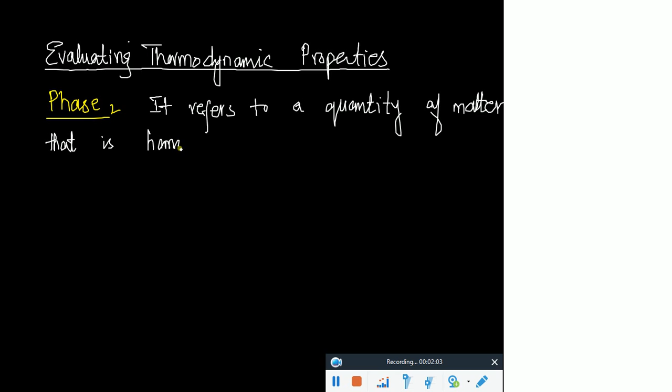First of all, let's define the term phase. So it refers to a quantity of matter that is homogeneous throughout, in both chemical composition and physical structure.

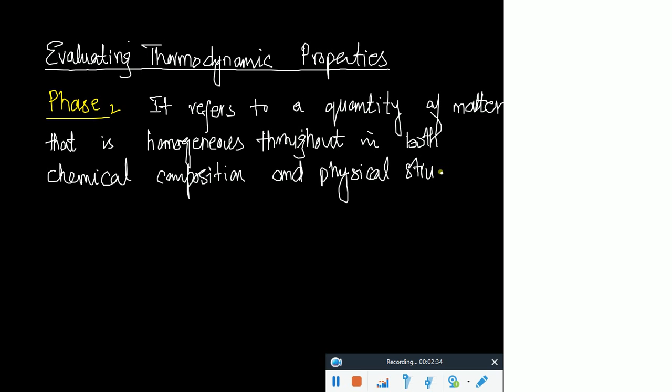Now looking at this, it means homogeneous. It means wherever you check, its properties remain the same, and chemical composition and physical state should also be the same. Just like there are 3 states of matter which we know as mechanical engineers. Obviously there are other ones like plasma, and I think someone has discovered another type, I don't remember the name, but yeah. So we have 3 commonly found states: solid, liquid and gas. Each of them describes a phase.

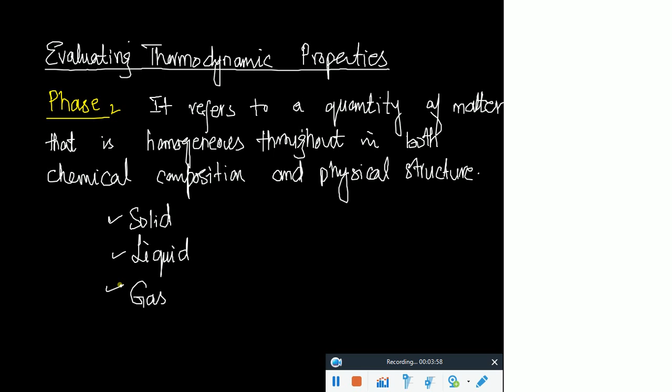Okay, like for example, if I tell you that there are some vapors and some liquid inside a container, how many phases would be there? 2 phases would be there. Now, if you have 2 immiscible fluids that can't be mixed together, just like petrol and water, what does that mean? You would have 2 phases. Why? Because you can't mix them together. So if you are able to mix them together, just like alcohol and water, you would say this has become 1 phase.

Okay, so then there is something which is known as a pure substance. It is one that is uniform and invariable in its chemical composition.

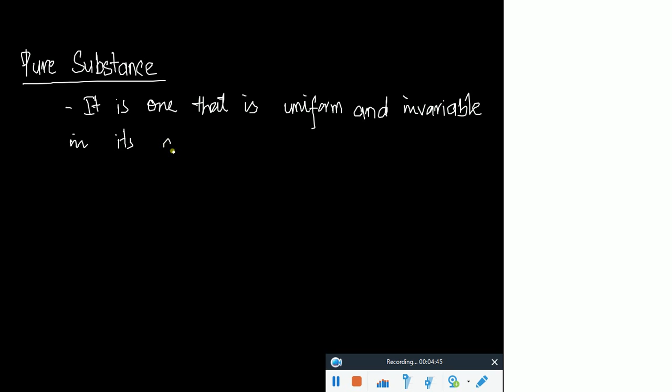Now for example, if you just look at water, if you have water inside a container and that water may have vapors or it may have some liquid as well - if you go to the vapor region and find out the chemical composition, still it is H2O. Okay, if you move on to the liquid region, you can see that its chemical composition is what? H2O. So chemical composition remains the same. So it means water itself is a pure substance, right? So this is something which you need to understand.

So I hope everything is clear about phase and pure substance. In pure substance, you can have different phases, but it should be the same chemical material - its chemical composition should remain the same. If you go into the phase, it relates to the material state, that means solid, gas, or liquid.

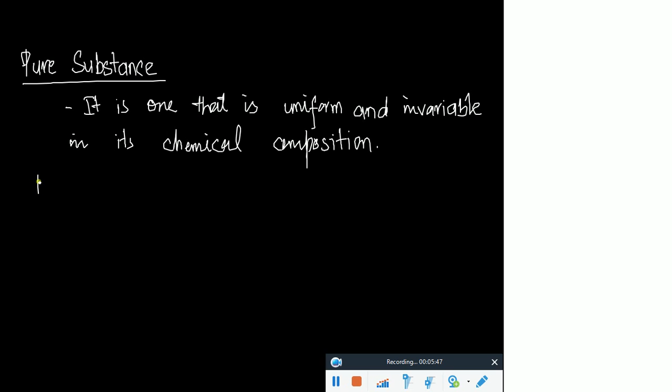Now, how can we find out the properties? Now, whenever you talk about state, what do you mean by that? It is a subset of properties, right? So if you define a state, what is the temperature, density, pressure, energy, everything related to this point. You jump on to the next point, then you define another state, and that state includes all those kinds of properties which you can measure.

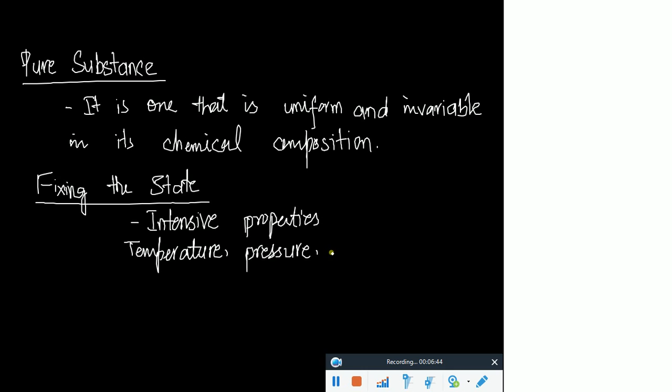So before going for fixing out the state, let me tell you that most of the time we are interested in intensive properties. What are those properties? Temperature, pressure may be an intensive property. Then we may be interested in density or specific volume. Okay, so these are the properties where we are most of the time interested in.

Now, before going to define the fixing state, remember one thing, that in engineering, the performance of any system may seem to be dependent on many properties. Just like, for example, any point in your system may depend on many properties, just like energy, internal energy, kinetic energy, potential energy, pressure, density, volume, whatever you call it. But the point is, in any engineering system, in every subject - in fluid mechanics, in control systems, in dynamics - you would see that sometimes few properties are independent and other properties are dependent on those properties. There would be 2, 3, 4 properties which are independent, and all the rest of the properties would be dependent on those independent properties. So the problem is you have to fix those independent properties first.

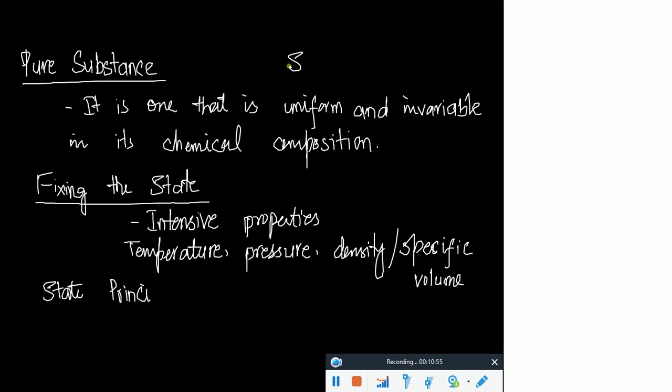Water and some other combination of gases which are commonly found are known as simple compressible systems. Now I hope you understand the word compressible. What does that mean? I'm sorry, this is system. What does compressible mean? Its density can change.

Whenever you talk about compressibility of a gas, compressibility of a liquid, compressibility of a solid - although it is not that visible in case of liquid - you would still have a certain property named bulk modulus in your mechanics of materials course. You would see that it is somehow related with this compressibility property. All these things are interrelated. I'm giving you a few examples from other subjects so you can have a flavor and understand these terms in their broader perspective. So compressibility means that the density can change.

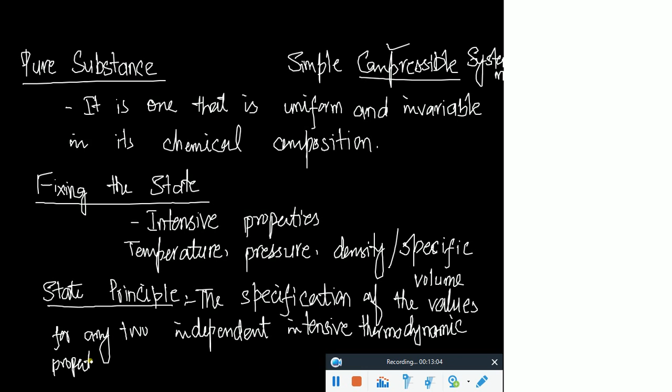So let me define the state principle for those simple compressible systems. Generally, you define it as: the specification of the values for any two independent intensive thermodynamic properties will fix the values for all other intensive thermodynamic properties.

That's what it means - the state principle says that if you specify two intensive properties of a thermodynamic system, it is sufficient to have all the other related intensive thermodynamic properties. For example, if you have temperature and pressure, you can measure all the other properties related to density, energy, enthalpy, internal energy, all other things can be measured. Similarly, you might have chosen temperature and specific volume.

By the way, specific volume is just the inverse of density, I hope you remember. So specific volume and temperature - it means that pressure would be a function of what? Temperature and specific volume, that's what it means. For example, if I need to find out pressure as an intensive property and I have temperature and specific volume, it would just be a function of these two things, like any other property - density, internal energy, enthalpy.

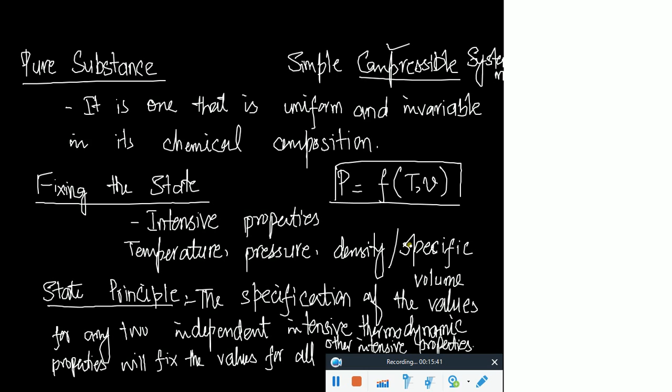You can say it's your parametric space. What does that mean? If you have pressure, temperature, specific volume, internal energy, enthalpy - let's say there are 5 variables and every variable would have so many values. Just look at the combinations which can be made by those 5 properties - it can be a huge number. So out of that huge parametric space, you have reduced it to only two independent properties.

Now this is quite interesting. We need to understand it very carefully. Just look at those lines.

It depends on you, but sometimes you have to perform experiments to check the independence. There are other techniques as well, like the Buckingham pi theorem in your fluid mechanics course. Most of the time it depends on experience - you can't just straight away say this is my independent property and this is not. Sometimes you have to use your experience, your knowledge, or rely on experiments. It is not that straightforward.

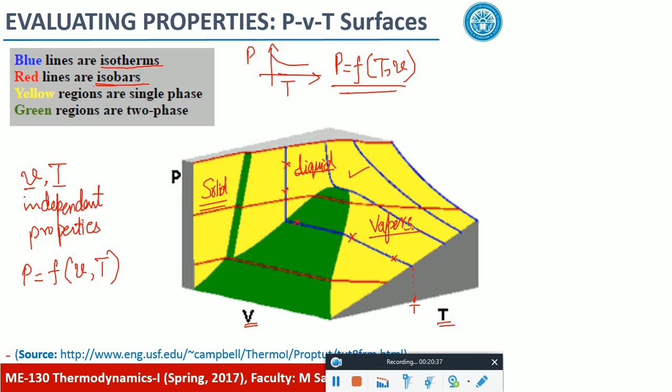For example, if I choose one point here on this surface - this is the point where I have a value of P1, V1 and T1, and this specification defines an equilibrium point. All of the points on this surface define what?

Equilibrium points. Now what does that mean, equilibrium points? Without giving some external energy, you can't change the state of the system. This is something which is an easy understanding for equilibrium. Without doing something externally, you can't change the state of the system. So you can say, if you talk about this point, any point.

So all the points define what? Equilibrium states of one system. Now quite luckily, there is a similarity found in the natural composition or the natural behavior of all the thermodynamic systems. Like for example, if you look at this, the surface would remain the same.

The overall shape of this surface would remain the same for all the thermodynamic properties, for all the thermodynamic substances. And it's quite interesting to see that even if you talk about a mixture of gases, you talk about water, you talk about any other thing, the shape of this surface would remain the same. And this is known as PVT surface. So in general, the shape of this surface remains the same for most of the thermodynamic systems.

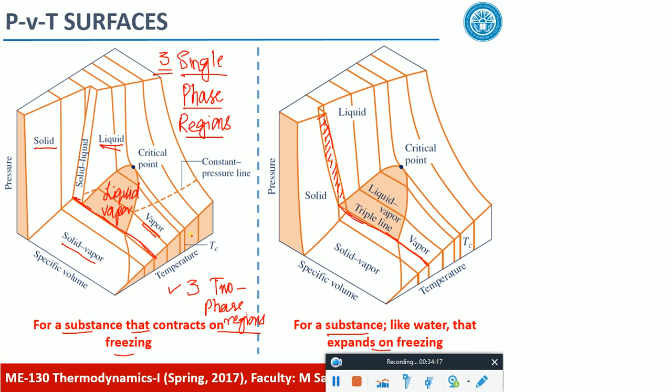Now, all these three regions—you have three two-phase regions. Now just look at this line, this red line, or this line. Along these two lines, you can say that all three phases would coexist. It means if you look at temperature, pressure, and specific volume values, and you get a certain set which comes onto those lines, this line or this line, all three phases coexist. This line is known as the triple line.

Coexisting means, for example, you have some vapors coming out of that solid part. You may have some ice, and the ice is melting as well, so all three phases are coexisting simultaneously. For example, if you have a cube of ice, you would see some vapors coming out of it, there would be some solid structure, and then there would be some liquid region as well. So they are at a boundary of solid and liquid—this is basically having both liquid and vapor, and this is having solid and vapor. So along this line, you can have all three phases coexisting, right?

No, I'm just talking about this. Remember one thing: these curves, or this surface, the shape of this surface, have been derived from experiments. Remember that—this is not coming from some fundamental principle, that according to energy, or according to first law, second law, or Newton's law, this shape is like this. No, this is something which has come out of experiments. So experiments have shown that along this line you have all three phases coexisting.

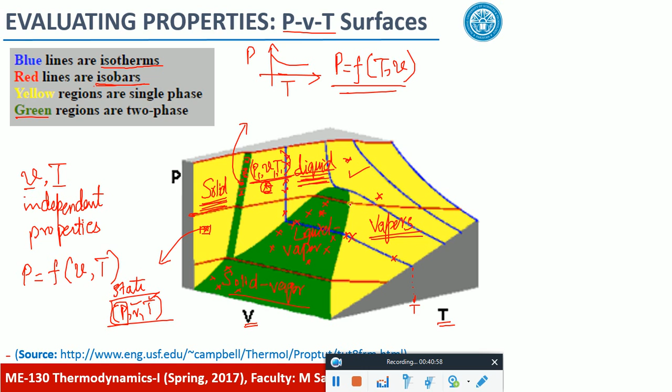What are you talking about, this line? No, if you are talking about this line, this should be an isotherm. If you talk about this line, this is a constant pressure line. Just look at that. The isobar, sorry, this is something which defines a specific value of pressure. So along this whole line you have the same pressure, so this is an isobar. If along some line you have the same temperature, it is an isotherm.

No, this is the maximum temperature where those two states can coexist. Solid liquid, it can be having a... No, I mean in this case this boundary lies along this line, it is not lying on a point, right? So that is why it is called a critical point. So it can be called a boiling point? No, I would discuss that boiling point as well.

So what do you call the pressure line going through the critical point? If you look at this pressure value, it would have a certain pressure P1, for example. There would be some other point which would also have that P1. There are so many points on this surface. If you connect all those points along this surface, this could be a critical pressure line, or you can say this is an isobar. That's what it means, okay.

Then in that case, by the way, there is a certain point from the practical point of view. I am talking from the practical perspective, in the applied sense. Applied sense says there is a point where this discussion becomes meaningless, whether the system is in liquid state or in vapor state. So there are some points we generally don't go beyond. But to define this surface, beyond that pressure line — this is the critical temperature line, this line — beyond this line, on this side you would have liquid, and on this side you would have vapors. Just to understand it, okay. So this is just to answer your question. So any other thing related to this figure?

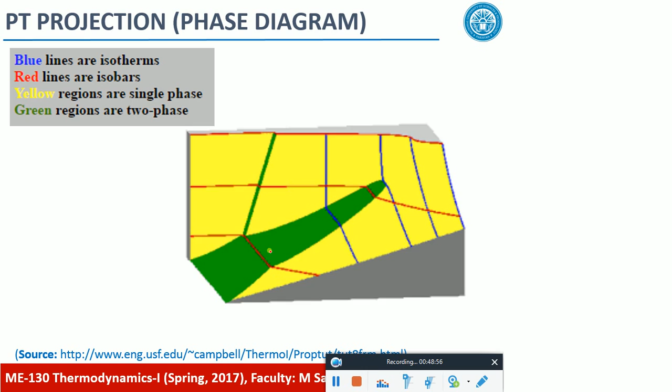You can't say that. You are ignoring the fact. You are just trying to make the things easier for you. You are just trying to simplify the things.

I told you that for Kelvin temperature you define the triple point as the reference, right? So this is the point we talked about, the triple point, on the phase diagram. This triple point has been agreed upon by the world to have a value of 273.16 Kelvin. This was agreed because you need to set certain references, certain standards, so you have to define where your zero lies. So this was taken as the reference point to define the Kelvin scale. You can say this is known as the triple point.

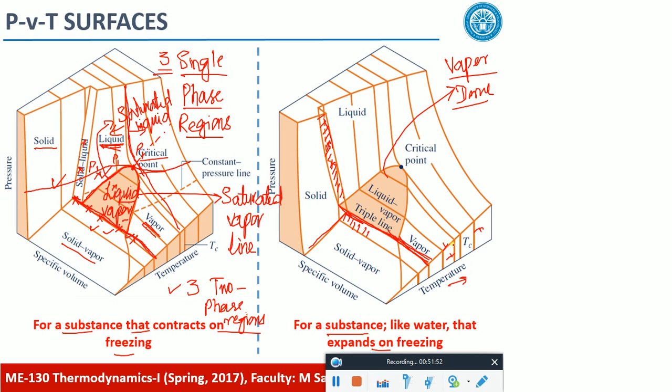What happens if there is a point in the gray region? There can be no point on the gray region, remember that. Why? Because if you just look at the dependence of pressure on specific volume and temperature, you would see this is how the surface goes. Can you have any point in this region? No, you can't have that. Your surface is going like this - for example, if you plot pressure and temperature and it's going like this, if I ask you what is the value of pressure at this temperature, would you say it is there? Obviously you would look at the surface. So this gray region is out of that surface - we are not interested in that. I hope you understand how we look at the projection.

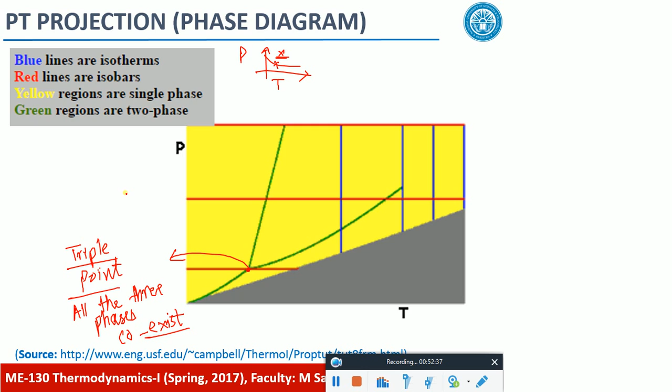So this is known as the phase diagram. Let me show a few points so I can explain that. For the next figure, how many orthogonal views can there be? Three. So we would look at all three.

These are the two plots we were talking about - this one is for a substance that contracts on freezing, and this one is for a substance that expands on freezing. Just look at that slope. So to answer your question once again - beyond this point, this is the temperature, so this is the critical temperature.

So within this region you would have what? And in this region you would have what? Liquid. Okay, so similarly the same thing happens over there.

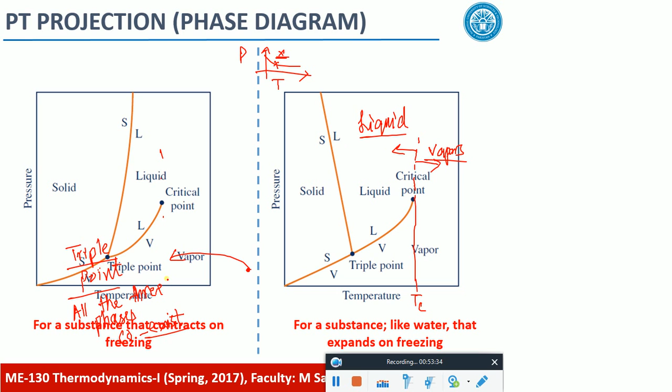So just keep your eyes very familiar with those figures, right? Okay, let's talk about the PV projection. On the vertical axis we would have P, on this side we have V. Just look at that.

So where are the isobars? What are the colors of the isobars? Red line. And you can see that the pressure value remains the same while specific volume can change. Now similarly, if I ask you about this isotherm - let's look at this isotherm. On this isotherm, you would have the critical point, the critical temperature.

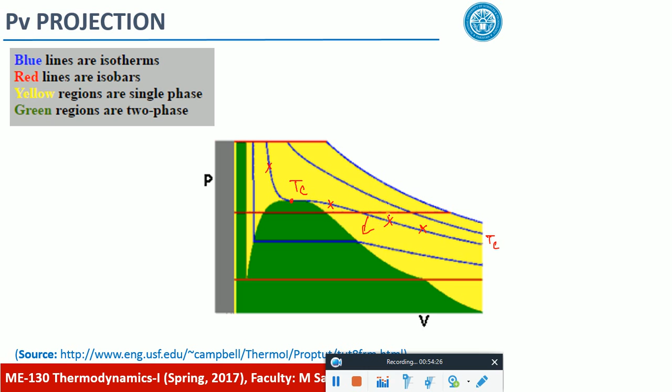So all the isotherms, all the constant temperature lines, which are lesser than critical temperature, they are passing through this dome. Now similarly, for all temperatures greater than critical temperature, you would not be able to pass through that dome. It means you won't be having liquids and vapors coexisting. Remember that.

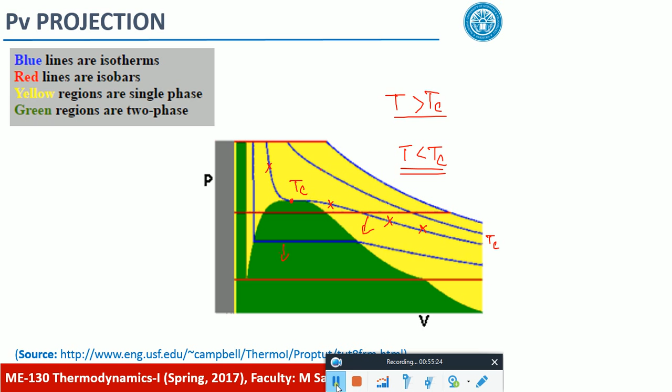So I have told you all the relevant important points. Can you repeat again what - just look at that, you can see how it looks for both. I'm also showing you the projections of those two figures for those two types of substances - contracts on freezing and expands on freezing. Okay, just look at that.

For specific volume, within that liquid-vapor region beyond this triple line, you can see there are certain points where this pressure remains the same. And just think of it - if you look at this region, I'm just talking about this region, this is the solid-liquid region, so this would be the liquid region. Just look at that - beyond this point, you can see that a small increase or decrease in specific volume can affect the pressure to a great extent. Just look at that - what is its slope? It is straight away coming down.

So if there is a small increase in specific volume, what you would see is a sharp decrement in pressure, right? But if you come to this region, which is basically the vapor region, the rate of pressure decrement would decrease. It would decrease, but not to the extent of what was happening over there.

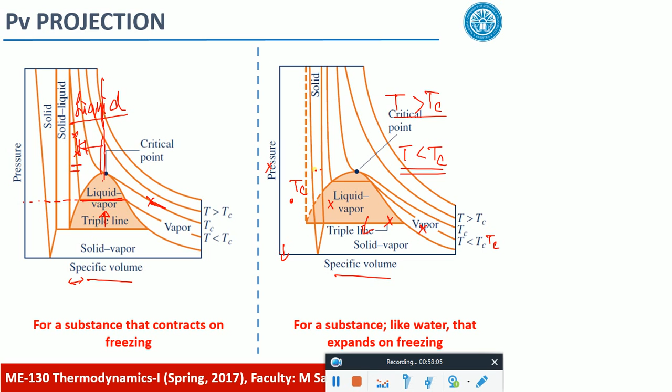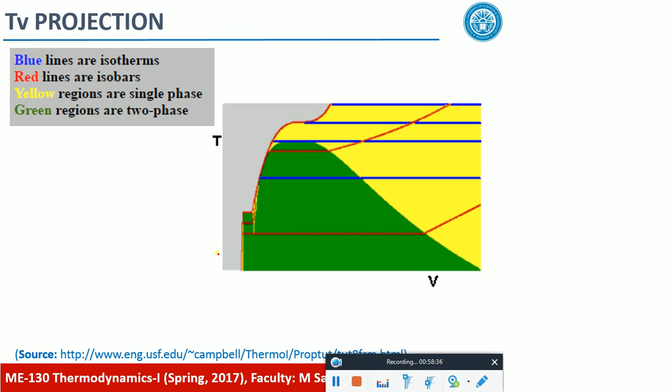And more appropriately for those two figures, this one—just look at that. This is Tv projection, and this is a representative figure for water. Okay, now be very careful and look at this very carefully.

For example, you start from this point. This is state 1, and this temperature is basically 20 degrees centigrade, which is 68 degrees Fahrenheit. I would just be considering degrees centigrade. So this point is basically 20 degrees centigrade, and what you have is liquid water, complete liquid state.

Right? Now this line is what? This line is known as what? Saturated liquid line. This line is known as what? Saturated vapor line. This point is known as the critical point.

Now, if you go beyond that, the situation becomes meaningless. But for the sake of understanding, beyond this critical point we would have all vapor state beyond this point. Now, if you start heating that system, just look at that figure, liquid water.

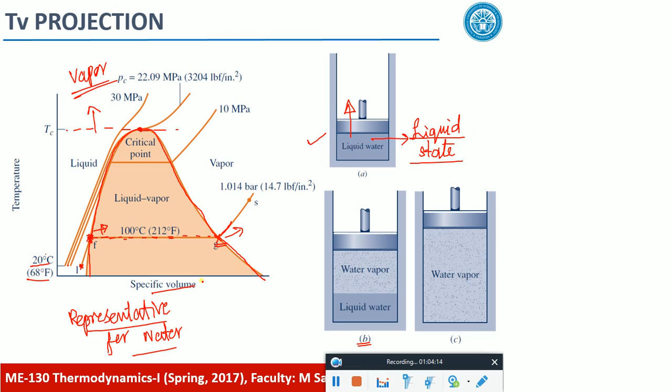So the point is, if you keep heating the system, you would reach that G point. And this G point is what? It defines the complete saturated vapor state. Once you convert all the liquid into vapors, a small change in specific volume would have a large change in temperature. This region beyond the saturated vapor line is known as the superheated vapor state.

This is known as the superheated vapor state. Whenever you talk about superheated steam, you might have heard this word. What does that mean? You are lying in this region, on the right side of the saturated vapor line. Understood?

Yes, along this line pressure remains the same. Now if you change the pressure, remember that. Let me come to the point I wanted to discuss. If you change the pressure, for example, you move to a lower pressure region, what would happen? Would that boiling point be reduced or increased? It would be reduced. For example, if I talk about somewhere here, this would be another isobar having a lesser value of pressure. So this is the boiling point for that pressure.

Is it reduced or increased? This was the boiling point at higher pressure. This was the boiling point at lower pressure. So temperature is decreased. If water boils at 100 degrees centigrade in Pindi, it may be boiling at, let's say, 98 degrees centigrade in Murree. Do you understand that? So that's how you can look at that figure and see what would be the boiling point, what would be the sublimation point, what would be the saturated vapor point, and all that. I'm sorry, where is that? This is point 1, this is F, and that was G.

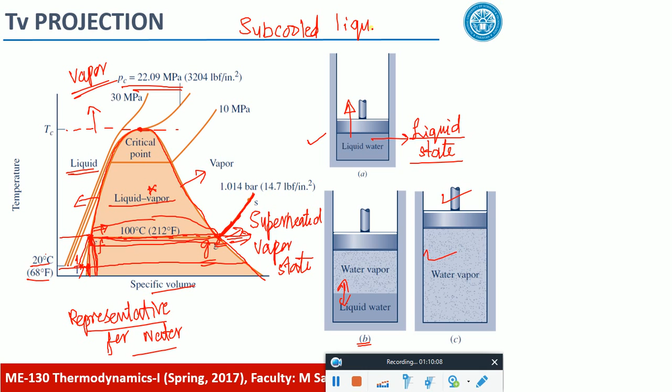Now, by the way, just to define it, this liquid region is also known as subcooled liquid region. I am just going to tell you a few names about these regions. Subcooled liquid region.

You can also call that region as compressed liquid region. By the way, these are the names used in the literature. In different books, you would see those names: compressed liquid region.

And I've already told you that this is something which you can call superheated vapor state, beyond that saturated vapor line.

Now, there comes the question: there should be a quantity which may tell us how much liquid has been converted into vapor, isn't it? For example, if I am at this point on this line, I should be knowing what percentage of liquid has been converted into vapors. I should be knowing it, isn't it?

Now, that quantity which defines this thing, how much liquid has been converted into vapors, that quantity is known as quality.

Are you going to compare this percentage for one level? Sorry?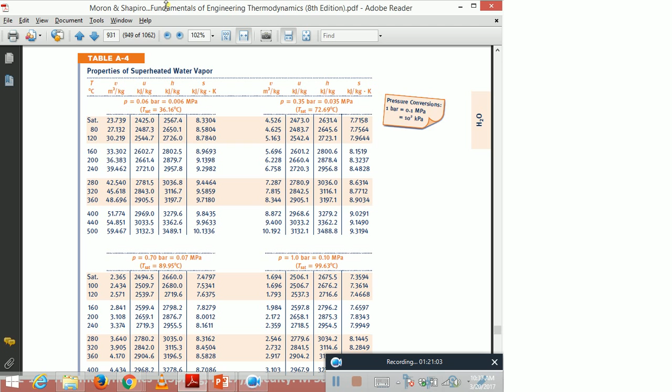Okay, my point is, I hope by just looking at that phrase superheated water vapor - let me make it bigger - yes, this one, I hope it is visible to all. Just look at that. This is properties of superheated water vapor. So similar kind of headings you would see on all the tables. Superheated, subcooled, compressed, all these things are there.

And by just looking at that phrase, you should be able to understand in what region your system is lying. Okay, and then just look at that superheated vapor state. It means that superheated vapor state is starting from which line? Saturated vapor line, right? So if you have this pressure 0.06 bar, you can also convert it into megapascal and all the rest of the units. Saturated temperature is what? 36.16 degrees centigrade. Now what does that mean? It is also giving you a value of the boiling point at that certain pressure. You see? Right? So just see that at saturated pressure temperature you have specific volume like this one.

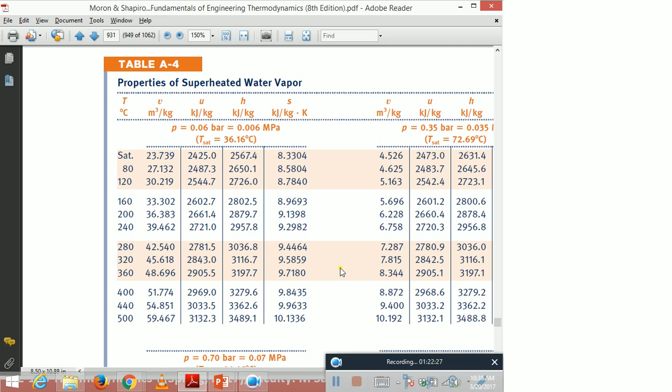Just forget about the other properties, we will talk about that later on. So specific volume is what? 23.739 meter cube per kg. If I ask you what is the value of, let's say, saturated temperature at a pressure of 0.35 bar, what is that?

It is 4.526. Just see, the temperature scale is only there. This temperature column is only there. So all the things remain the same.

Okay, so now there is a very interesting point. If I ask you, let me tell you this very quickly because we are short of time. If I ask you what is the value of specific volume at a temperature of 100 degrees centigrade, do you have any specification for 100 degrees centigrade over there? Not at all. Now, what would you do then? You have a value of 80 and then you would have a value of 120.

So, for example, if it is right in the middle of those two values, 100 is right in the middle, you can take the average. But if it is, let's say, 95, then you would do interpolation. Then you would do what? Interpolation.

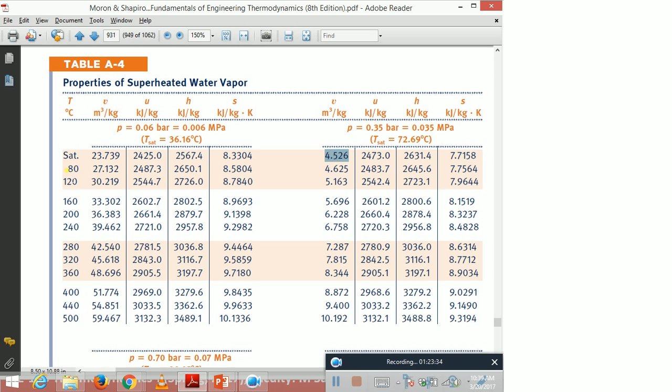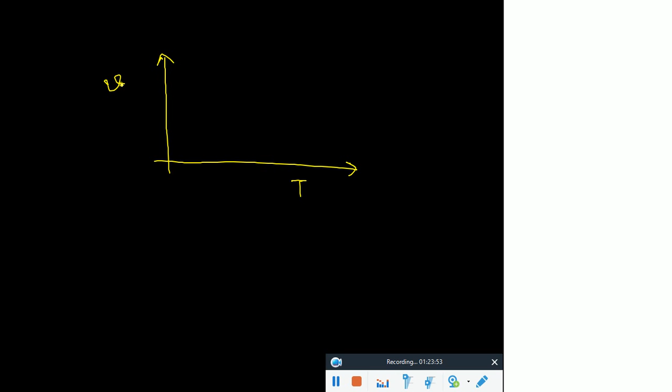Just like, for example, let me plot this figure for you. Let's say we have temperature on this side and we have specific volume on this side. I am just reversing the axis. I hope you understand that. Now this is the point for 80 degrees centigrade, let's say, and this is the point for, let's say, 120 degrees centigrade.

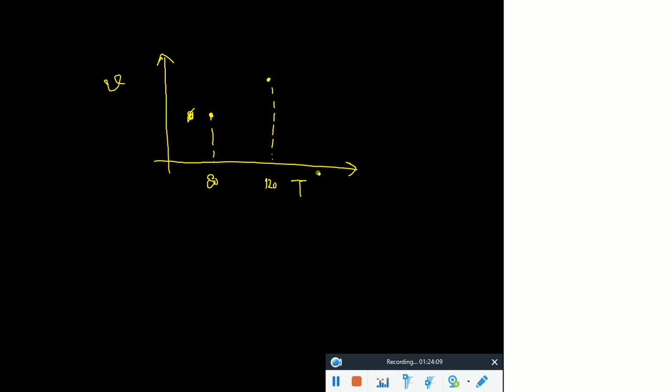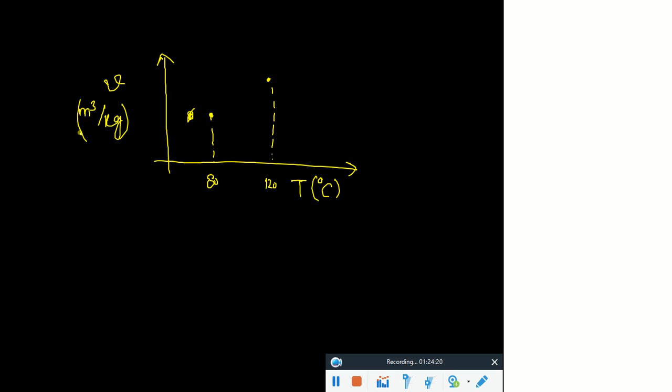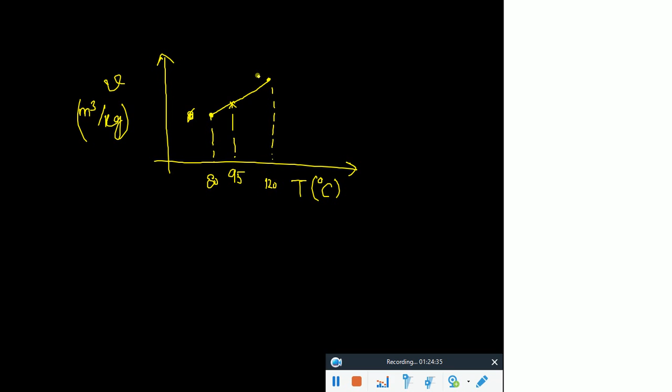Always show the axis label and units whenever you draw the plot. Remember that, right? Now, if I just join those 2 points by a line and I want to find out a value at 95 degrees centigrade, I am lying somewhere here.

This kind of process is known as linear interpolation. Why it is known as linear interpolation? Because I am trying to fit a line for all the data points between those two known points. These are the two known points. So I am trying to fit all the data points between those two known points by a line.

So that is why it is known as linear interpolation. If I draw a cubic line, I would say that it is cubic interpolation. If I am trying to draw something like a parabola between those 2 points, I would say it is a quadratic interpolation, right? So something like that. So you can see what is the difference between linear interpolation, and you would see these kind of things in your numerical analysis course.

But the point is, if I want to have this value, can you tell me how can I find that out? I hope you see, because this is the equation of a line, isn't it? Can I say that this is something y minus y1 would be equal to m into x minus x1? Can I say that? How can I find out that m?

If it is, let's say, T2, and if it is T1, and similarly if it is V2 and if it is V1, I can say V2 minus V1 over T2 minus T1, into x minus. So you can take any, like this would be V1 then, and this would be T1 then.

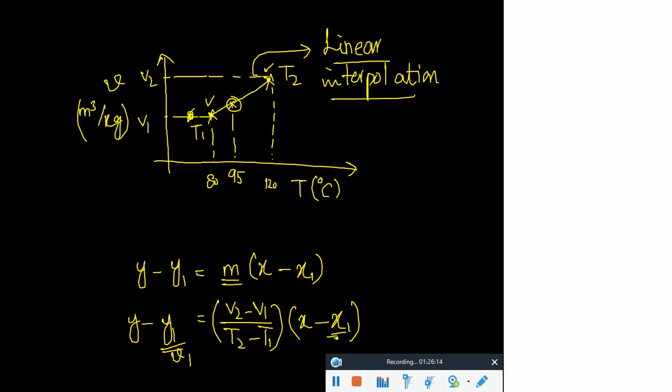Okay, so for example, if I just give you the actual values, at this point you have 27.13 for the lower temperature, and then you would have 30.209. So what I can see is this would be y minus what? This y is something which is known as V, right? On the y axis I have V. So V minus V1, which is 27.13, equals 30.209 minus 27.13 over T2 minus T1, which is 120 minus 80, and then this should be equal to times T minus what?

X1 was 80. Okay, so now if I plug the value of 95 over there, I would get the value of V, right? So if you have a value right in the middle of those two given values, you can take the average, no problem at all. Why? Because you would be lying exactly in the middle, so it would be exactly the average, no problem at all. But if you are going somewhere here and there from the middle point, it means you have to go for the linear interpolation.

Okay, so those were the points for today's lecture. We have seen how we can describe the PVT surface, what are the important regions, lines and points, how you can associate those two regions with your practical situation of the system, and then how you can use those tables at least for two regions. I am just talking about single phase regions. Remember that I am just talking about single phase regions. I have told you something about the vapor region. In the next class we would talk about something like the compressed liquids, and then we would also talk about the vapor dome as well. Okay.